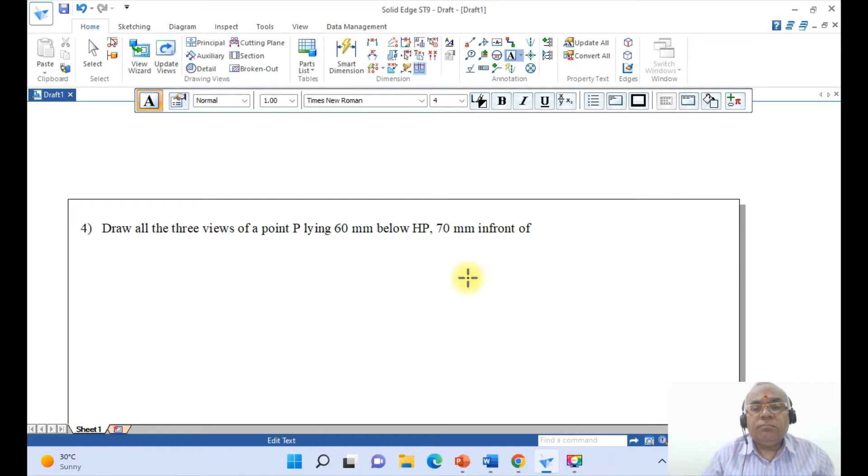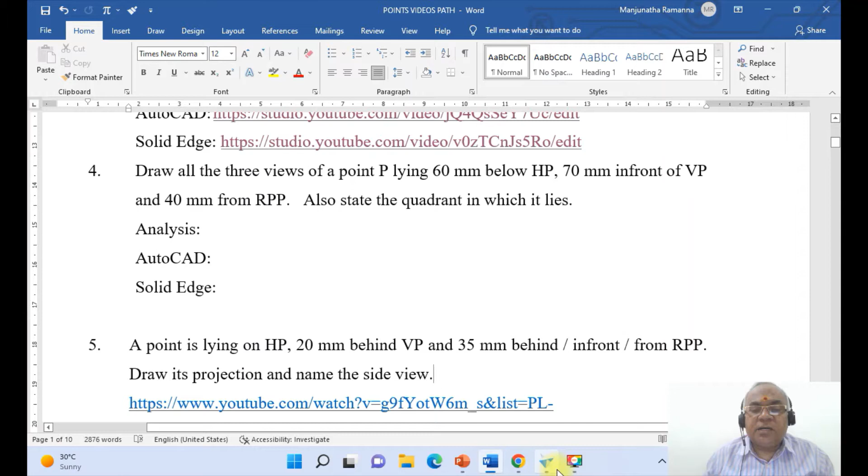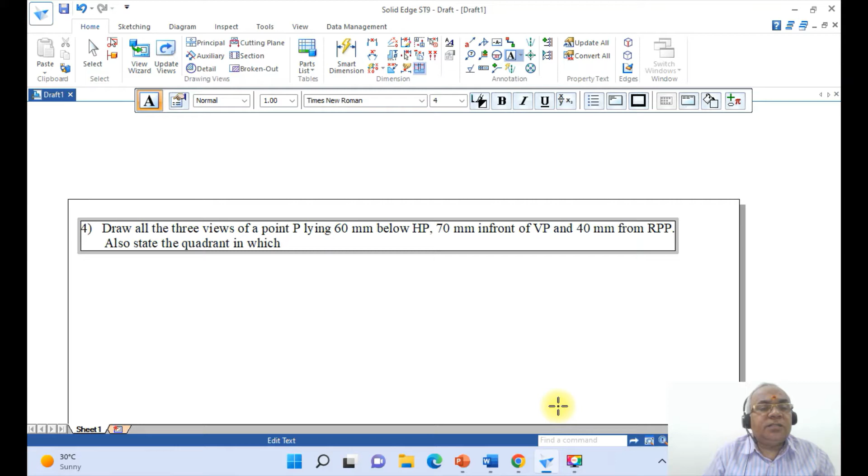Then draw its projections. Also state the quadrant in which it lies. Now once you do that, by default you are going to have only the name.

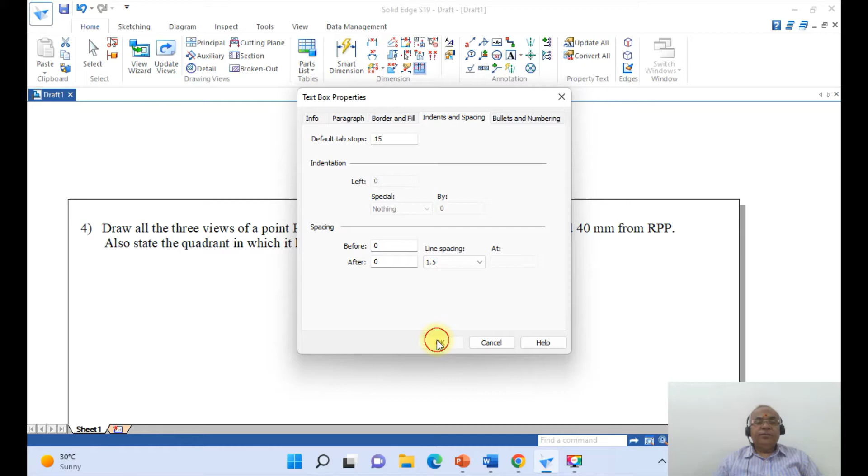You just go to this and click on this and go to properties and then go to paragraph, or indent and spacing. Line spacing should be 1.5, so that between the lines it will be 1.5. Then first you draw the xy and x1 y1 line, xy and x1 y1 of 0.13, and all other projector lines will be 0.05. So to do that, go to view and click on fit.

So now first we go for sketching, click on line. First you set the line width. By default it will be always 0.5. Make it 0.05 because those are all the projector lines. So you just click on endpoint and switch off the point on element. You have intersection and then click on this. Only 3 should be there.

If you don't get this option, I am using the higher end of the Solid Edge version, and if you are using the lower end version, then you will not have this particular display, which is called IntelliSketch. So you just go to view and click on IntelliSketch there and enable and disable the requirement. Always remember that endpoint and intersection go together, and then you have horizontal or vertical.

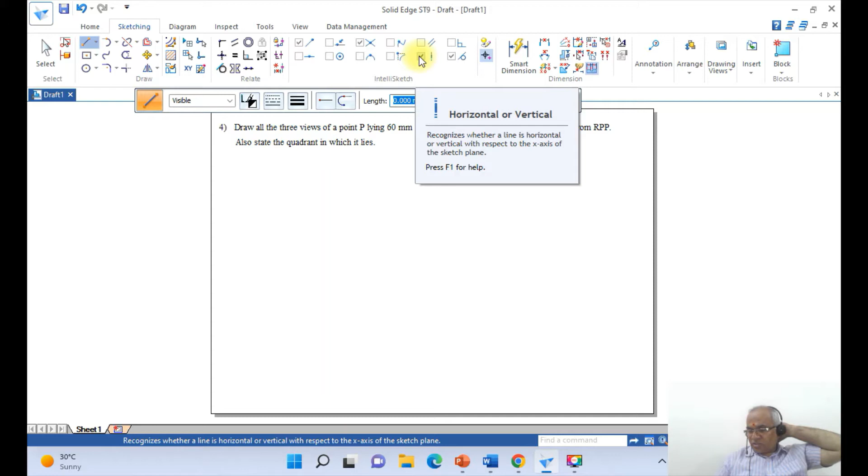So go to line and you just take 0.05, then draw a horizontal line of any distance. Then you just click enter. Again I want to draw a vertical line. You just select some point and then draw a vertical line. Then we need to identify the planes now. What are the planes? VP, HP and RPP.

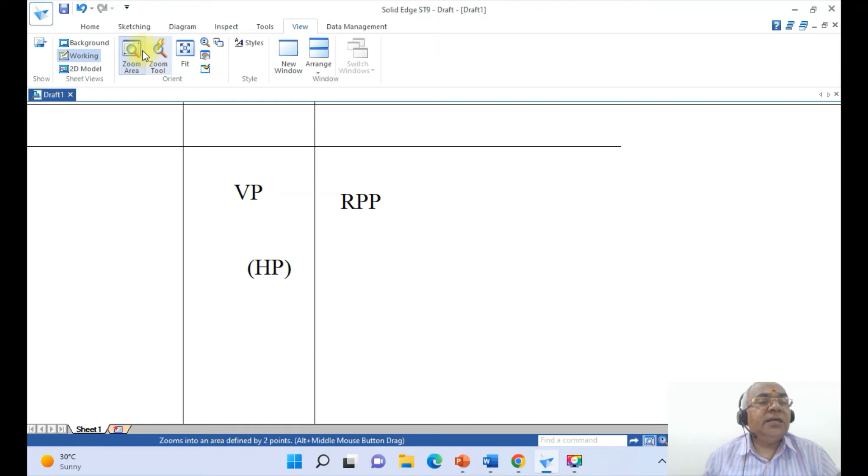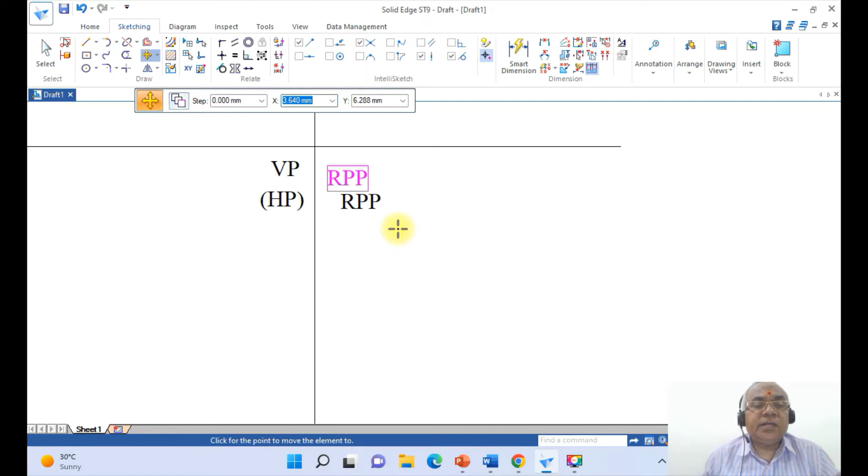So go to home, click on this text annotation. You mark it as VP and then you place HP in bracket, and here you type RPP. Then go to sketching. Go to view, go to zoom area, take this and then go to sketch, then go to move, switch off the copy mode. You just click on this and again take this here. Once you move all the 3, go to view and click on fit.

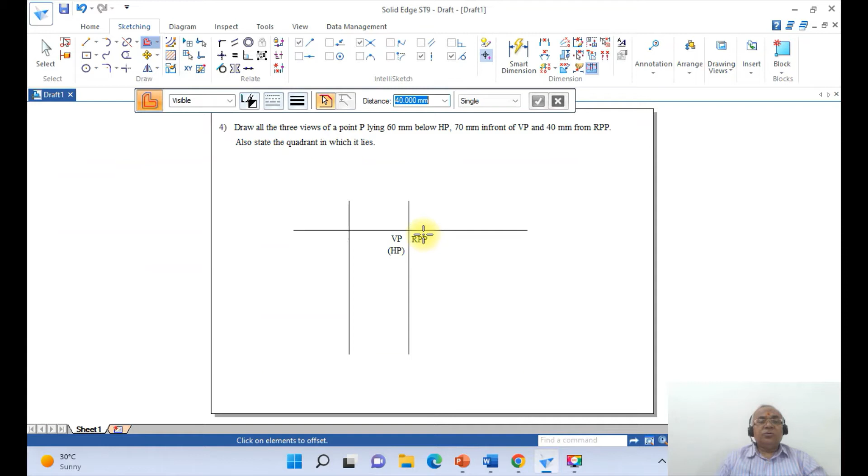Now first we need to draw a parallel line to this existing line. To do that, go to command offset, take the distance as 40 mm. You select this line and offset on this side, and again you take 70 mm. That is, you are going to get 70 mm below XY line and also 60 mm below XY line. You are already in the offset command, type 60. So below HP is 60.

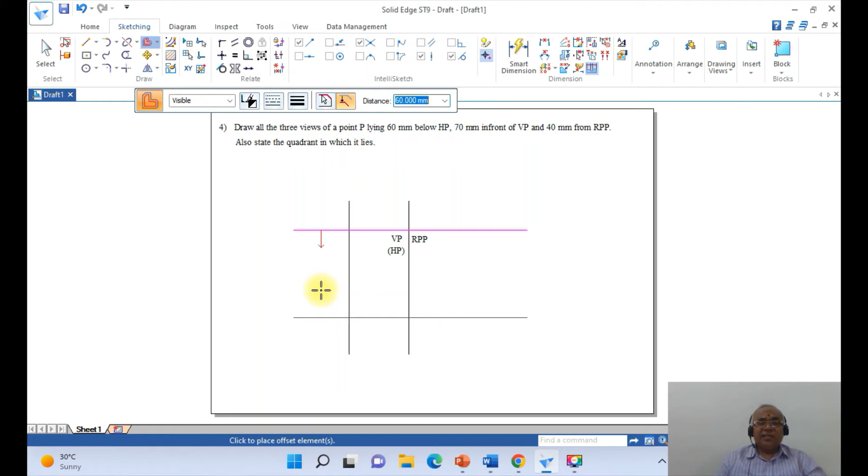You select this and accept by clicking the right button of your mouse, and again take the cursor down, click the left button of the mouse. Do you want to continue? Cancel. Similarly, you want this 60 mm, from here to here. Go to offset, take the distance as 60 mm. Select below HP, then take 70 mm because it is in front of VP. Select this and take it in front of VP.

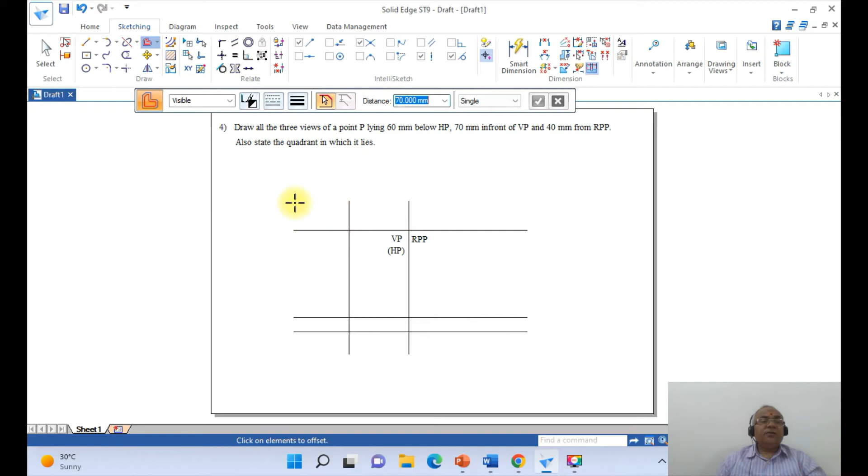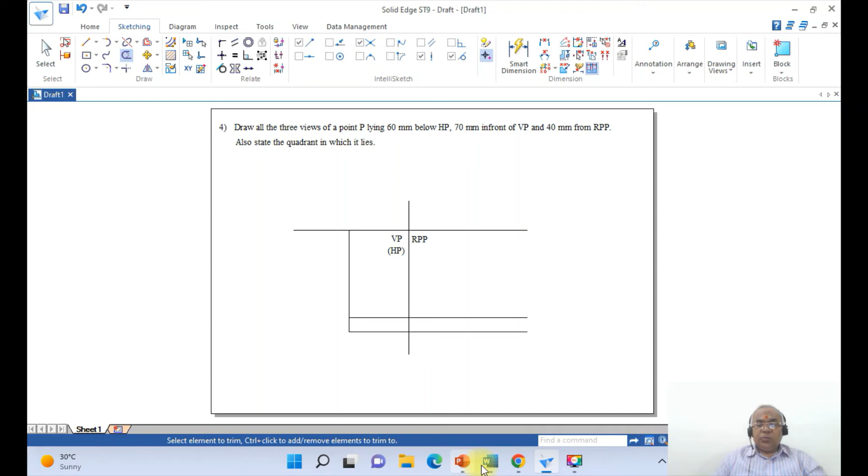Then go to trim corner between these two and trim corner between these two. Then trim this line. Now once you do that, you just draw from the origin point so that it will pass through the top view. The point is in front of VP.

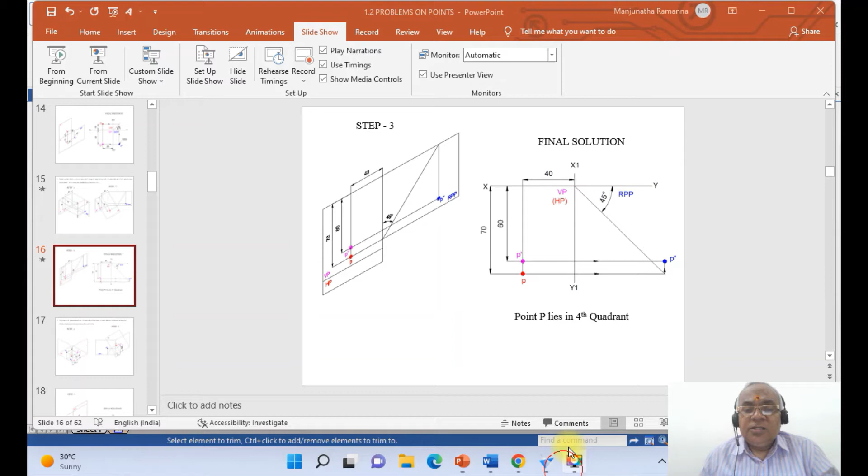So to do that, you take that line, go to line. Since the horizontal plane is below the XY line and adjacent to RPP, you take the intersection of this and take 200 mm. The angle is minus 45. So once you do that, you will go and get the extension.

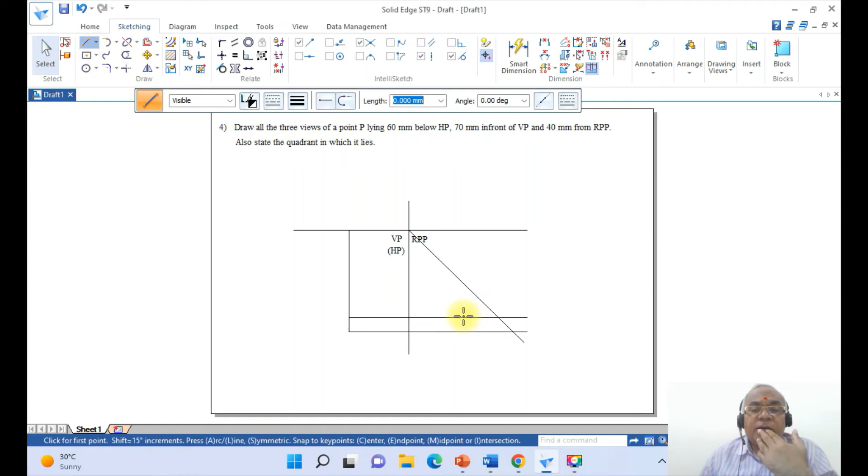Then go to split this line somewhere here. Then just go to select, click on this and remove it. Then go to line and draw a line from the intersection part of this and draw a perpendicular line. Then go to trim corner between these two and between these two. Once you do that,

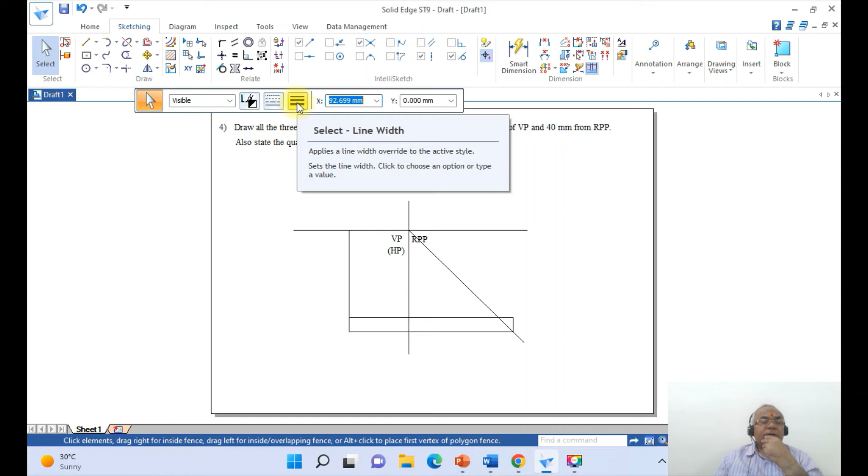then go to sketching, click on point. Now you take the point of this, the point of this, and the point of this. Then go to select, you select between these two. Then you just go to point and enable those points.

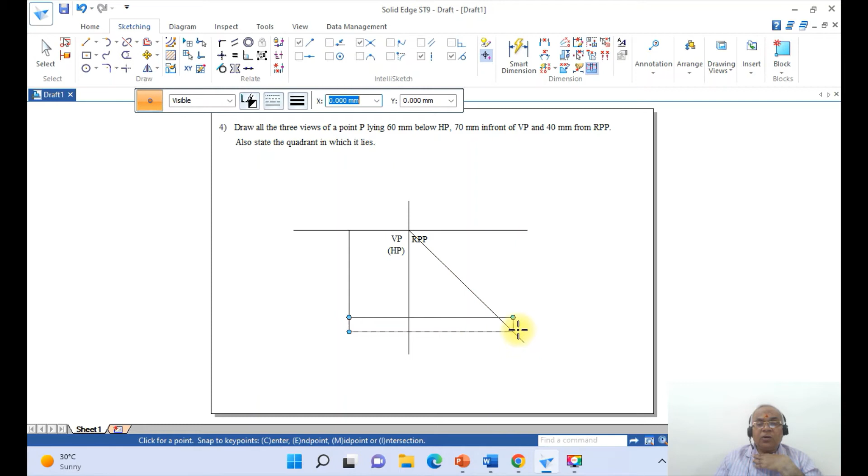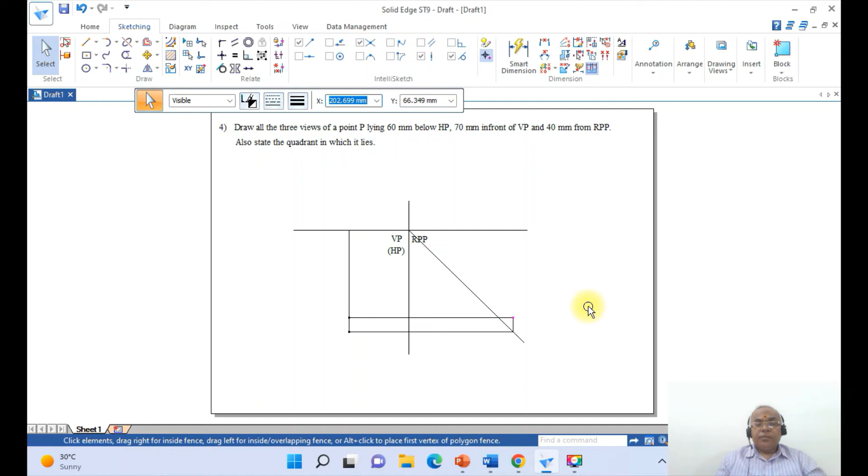You just click on one point and keep that point here, and also you want to keep this point here. Then go to home, select between these two and make it 2 mm. Similarly, you select this and make it 2 mm. So once you do that, you are going to get the drawing here.

Now he says point P, so go to home, click on annotation and mark this as P dash, this as P, and this as P double dash. Then go to sketch, click on move and take this here. Similarly, P is here, you take that, and P double dash is here.

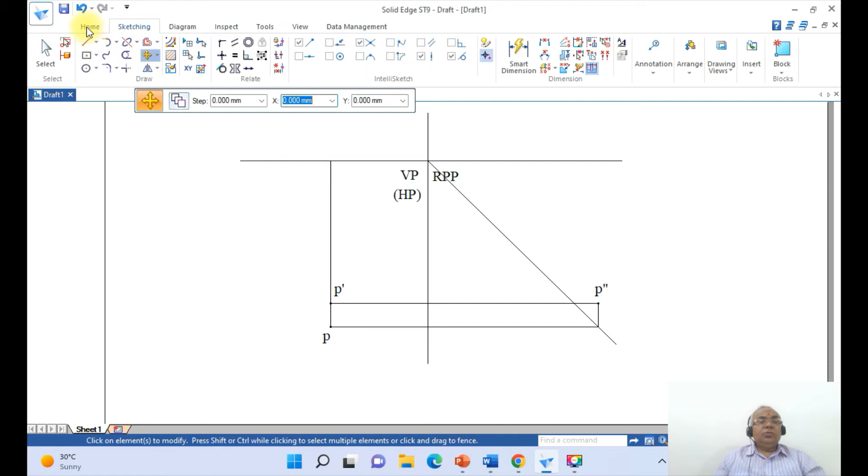Then go to home, click on dimension styles, and then go to dimension in ISO, click on modify and go to text, click on Times New Roman, then take the font size as 4, then lines and coordinates. I want the dimension line width as 0.1 because you should draw a thin dimension line.

And text is over, then go to secondary text, then linear dimension, make it mm and the round off value as 1. Then come down to units, linear, make it 1, and then angular degrees round off to 1. Then general, come down to these blacks, and then black, and say OK and say apply.

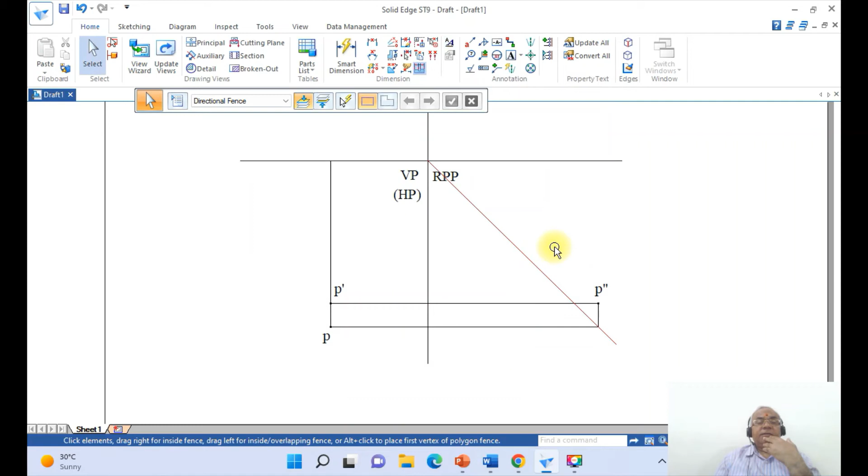Now go to sketching and come down to dimension, that is distance between. The endpoint is enabled here, so it takes the endpoint of this and the endpoint of this, and take the distance as 60. Again go to the endpoint of this, distance between this line, and make it 70.

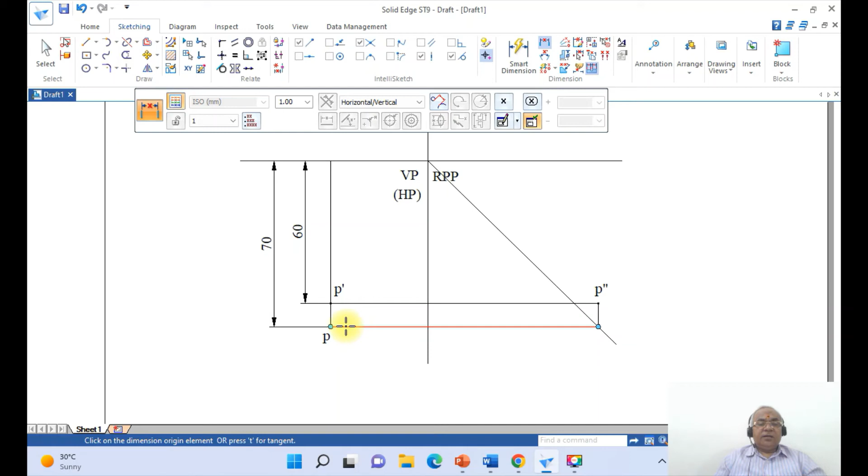Again take another distance between command, take the end point of this, and take this as 40 mm. Then again move it, then this P comes out here, then P double dash is here. Then you need to type the text here.

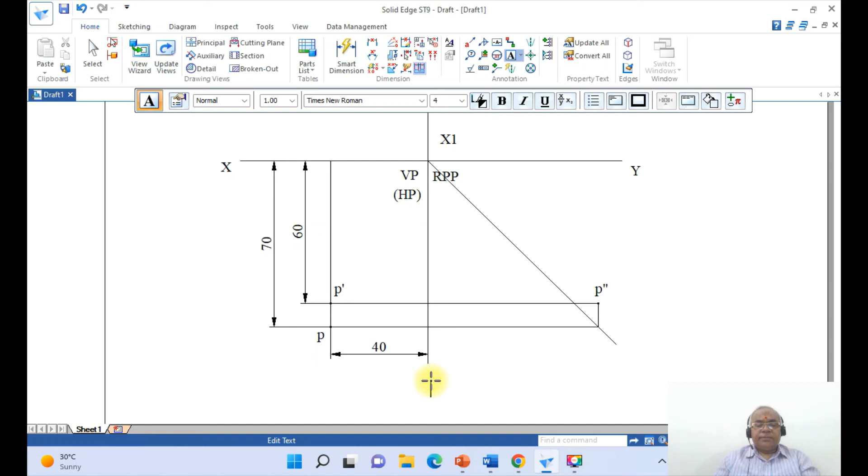Go to home, click on annotation, type capital X and capital Y and capital X1 and here capital Y1. Then go to view, click on fit, then zoom area, then go to sketch, click on move, take this and keep it here.

Similarly, X1 is here and Y1 is here, and all these things I am moving only by using the move command. You can see here, if I click on move, click for the point to move from, I just click some arbitrary point and take it inside like this. And where you have the front view, on that line you are going to get the side view.

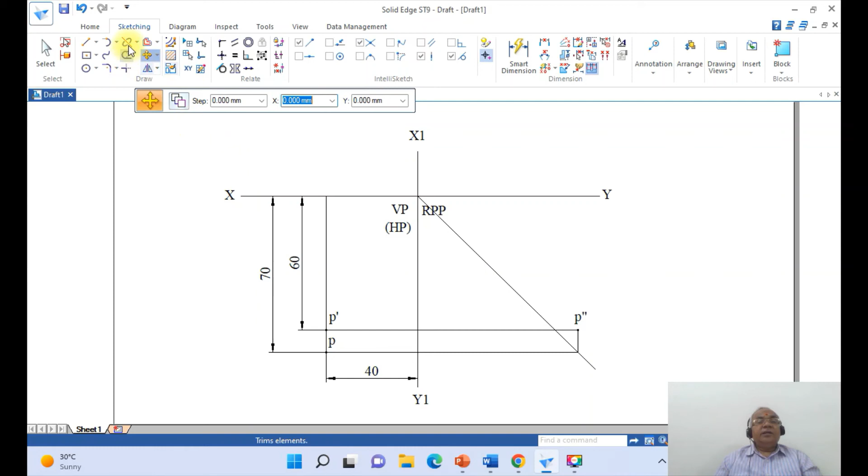Now I need to give the line widths. All the lines which are drawn, go to sketch, select these two lines and make sure they are 0.13. We are not doing it in the beginning itself because if you try to offset this, the offset line will also have the line width of 0.13.

So in order to avoid that, first you complete all the drawings by taking the line width of 0.05. And once you complete your drawing, take those two entities which you want to change and change them to 0.13.

So now we need to draw the leaders. Go to leader, click on sketch, come down to point on element. Drag this and keep it. Similarly, drag this and keep it. Then you keep this.

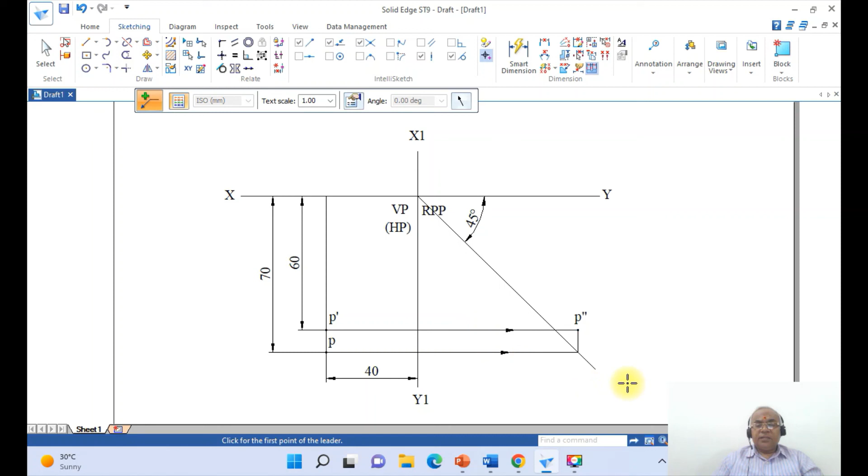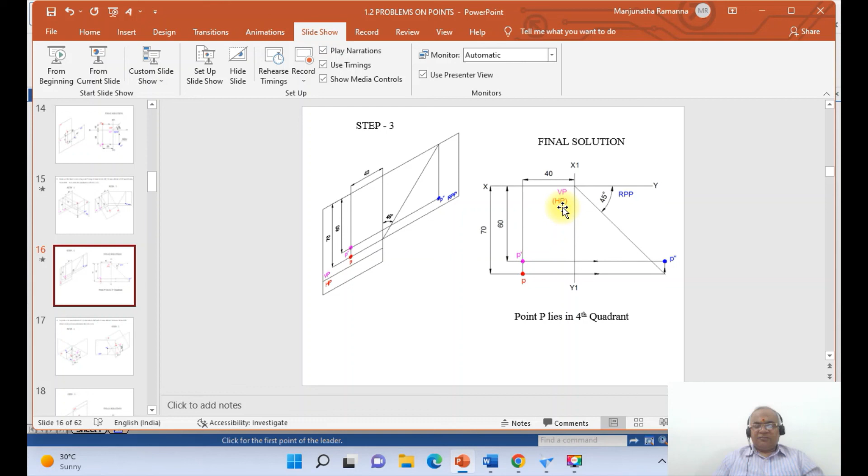So this is how you will be able to solve the problem by using the Solid Edge software. Then go to view, click on fit. This is the final solution, which is exactly similar to the one given here for your explanation. Then I need to write that point P lies in the fourth quadrant.

To do that, go to sketch, home, click on annotation. Here you write point capital P lies in fourth quadrant, and then right click. So this is how you will be able to draw the solution on the projections of points in the fourth quadrant by using the Solid Edge software.